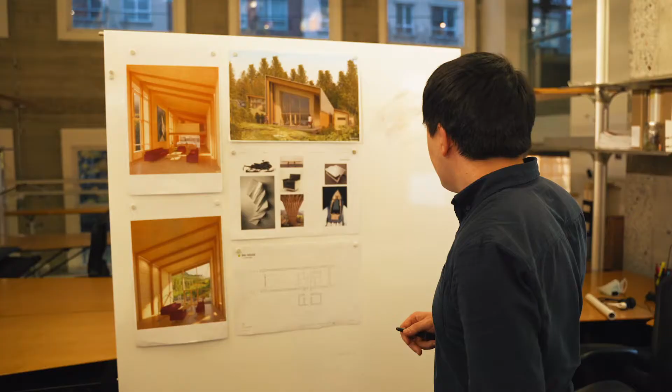SoLo was born out of a deeper understanding of the impact buildings have on emissions, climate change, and health and well-being. This project afforded ourselves and the broader project team an opportunity to test ways and means to achieve net zero, both in embodied and operational emissions.

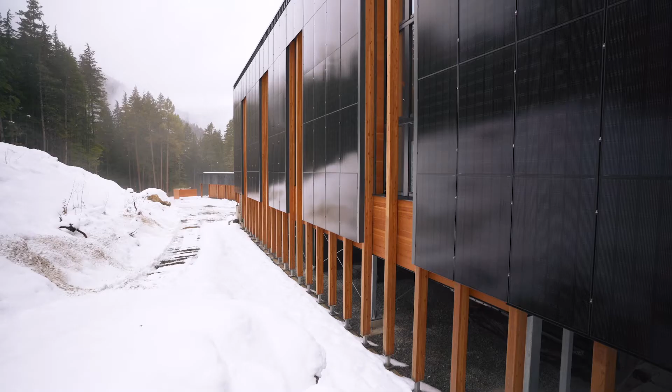Our president, Bruce Langereis, has coined the name SoLo as a nod to its isolated location in the lower Squamish Valley, but also as a reference to its zero emissions profile and the fact that it stands alone as a one-off example as a future way to build. SoLo represents a new way forward for Delta land development and is a catalyst to help accelerate change in the broader development and building industry.

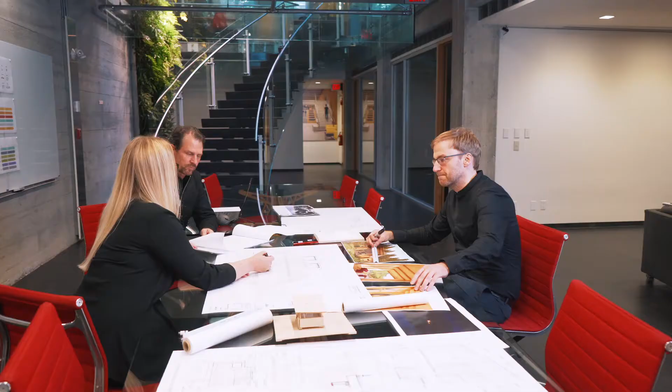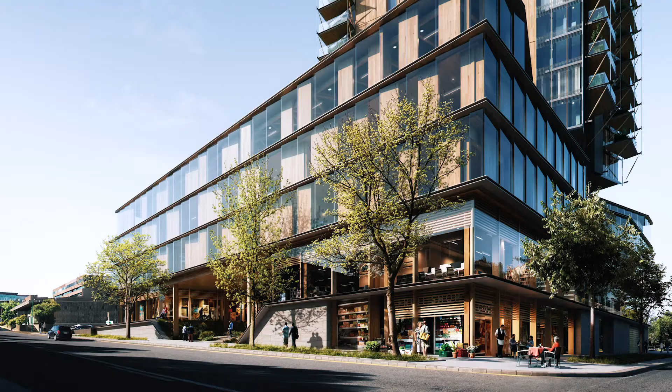Delta was looking for an architect that shared their alignment of values, and that's what led them to reach out to us. Our studio, Perkins & Will, are really known for our reputation in environmental stewardship. We started our work with Delta by creating an overarching set of principles and goals that would lead every decision made on the project. Delta wanted to test out not just the mass timber construction methods that had been proposed for Canada's Earth Tower, but also the broader set of principles and goals around holistic design.

This includes everything from eliminating harmful materials used both in construction and finishes, minimizing our energy consumption through high-performance appliances and fixtures, while also generating energy on site, and reducing emissions. The building structure is beyond carbon neutral, and the building does not rely on combustion for operations. SoLo is a proof of concept. It proves that buildings can counteract their negative consequences and act as a source of repair.

Delta wanted an open layout, something that would serve both as a single-family home, but also be able to host large groups for events, gatherings, and educational purposes. Beyond just a house, Delta really wanted to make a statement. They wanted something with wow factor, something that would celebrate the natural beauty of the site and prove that building sustainably and to the Passive House standard doesn't mean sacrificing design aesthetics or beauty.

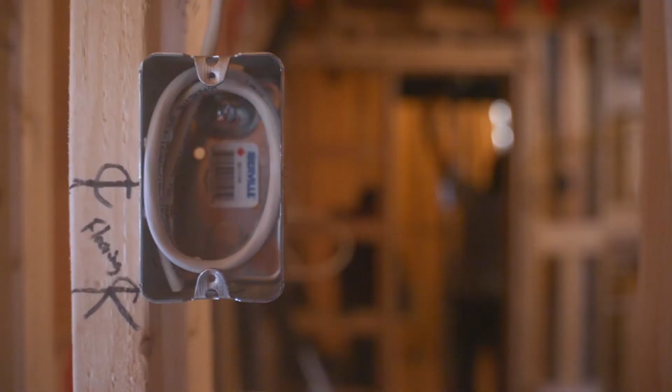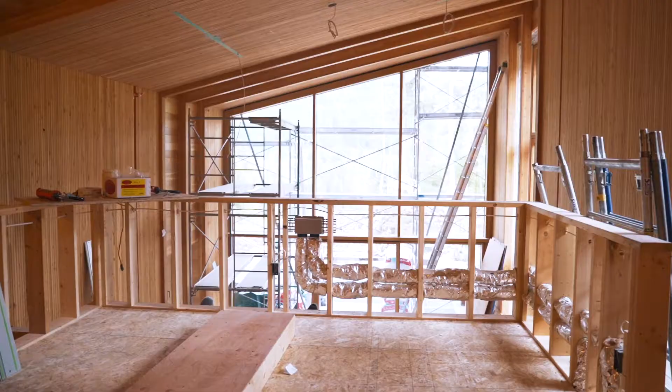The remote location of the site drove all of the design decisions, from building siting and construction methods to the interior finishes. The remote nature of the site led the project naturally towards prefabrication and modular construction methods. This allowed the panels to be built off-site in the shop during the winter months, and then to be erected quickly on-site during the shortened building season.

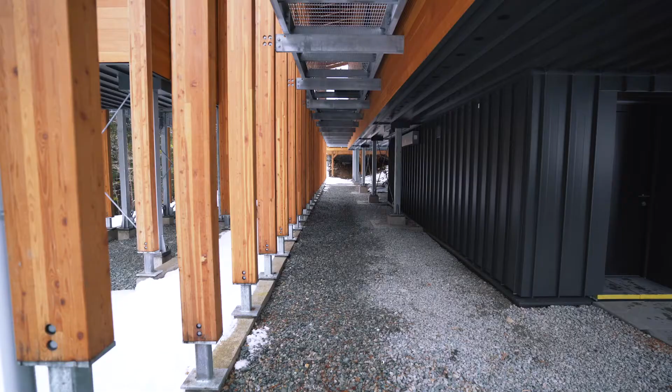We designed SoLo to have a performance-led aesthetic. It contains a limited material palette and contains architectural features that are authentic and unsentimental. The building sits on a raised platform above the uneven terrain of the site. It touches the ground lightly and allows nature to remain the focus. As you walk up the front steps, the covered walkway frames a view to the mountains beyond.

Wood was chosen as the primary structural material. It was the obvious choice to reduce our carbon footprint, but it also provided flexibility for the prefabrication of the modular panels.

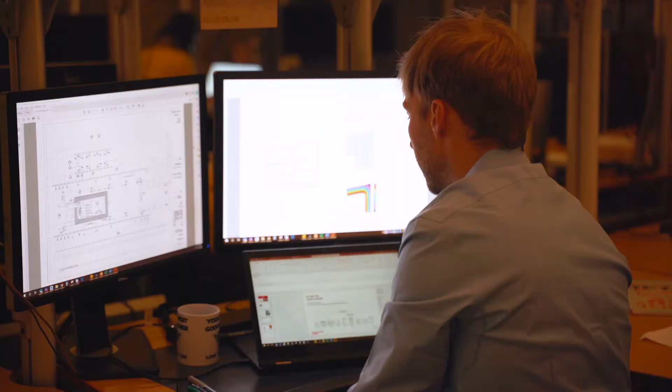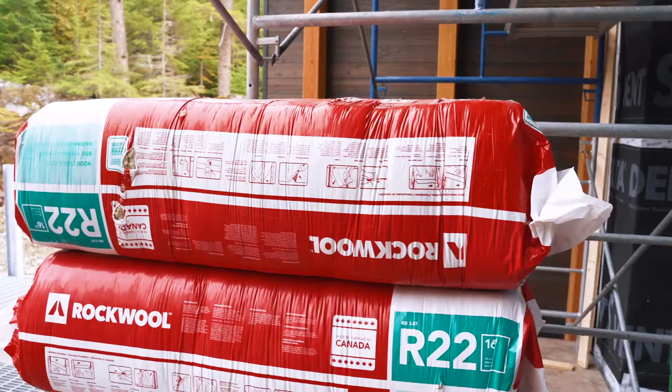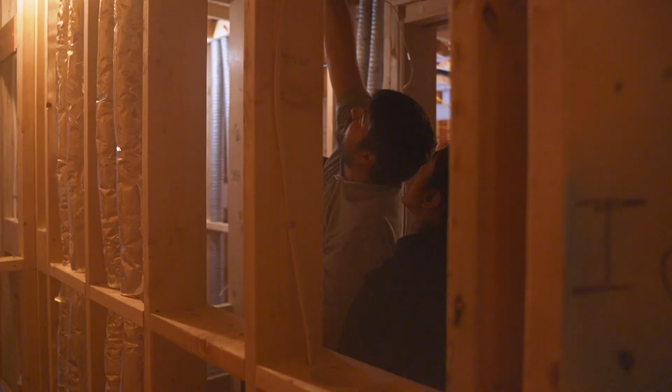Thermal comfort is guaranteed through a thick 2-foot layer of mineral wool insulation that wraps the mass timber structure, in addition to high-performance triple-pane glazing systems. Detailed thermal bridge calculations are carried out at design stage, and an air tightness blower door test is done at construction stage. These measures minimize heat loss, eliminate drafts, and reduce the risk of condensation buildup.

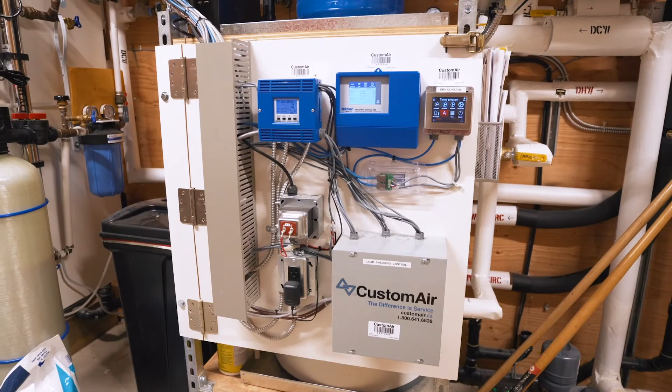The glazing design is optimized to maximize views to the valley outside and promote daylighting, while allowing sun in the winter and eliminating solar gain in the summer. A high-efficiency heat recovery ventilation system ensures a constant supply of fresh air, while recovering waste heat from areas like the kitchens and bathrooms. Natural ventilation is used for cooling in the summer, with windows judiciously sized and placed to promote cross-ventilation.

The small heating demand in winter is provided for by a radiant underfloor heating system. This is fed by a ground source heat pump that uses energy from the sun that is stored in the ground as heat. Energy is generated on site through the use of 103 solar panels mounted on the south facade. The vertical mounting allows the PV system to remain clear of snow in the winter when energy generation is crucial.

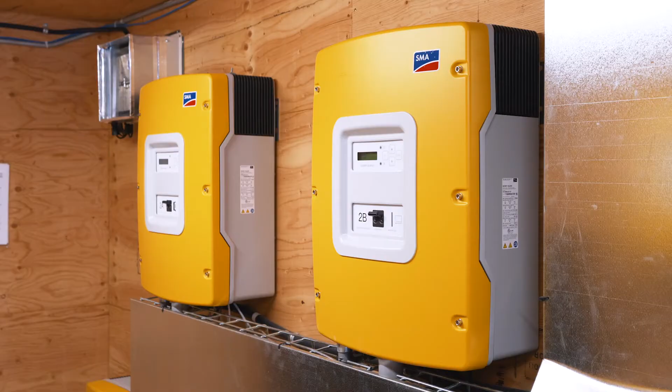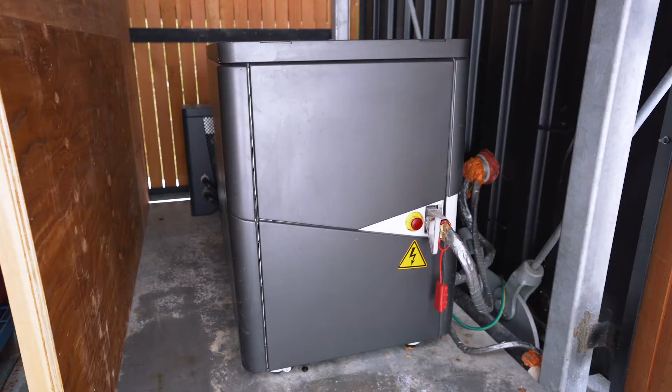The PV system links back to a set of batteries which store the energy generated. Being an off-grid site, we need a backup power source. This is provided for by the hydrogen fuel cell. This means that the building does not consume fossil fuels, nor does it require combustion to operate.

This results in a self-sufficient house that generates more energy than it uses and goes beyond net zero energy. It tackles both embodied and operational carbon and creates an innovative model for buildings in the face of the climate crisis.

The construction and operation of buildings contributes nearly 40% of global CO2 emissions, and it's broadly accepted that this has to change. SoLo was our first opportunity to explore ways and means to get to a truly net zero outcome and radically improve on what has been done before.

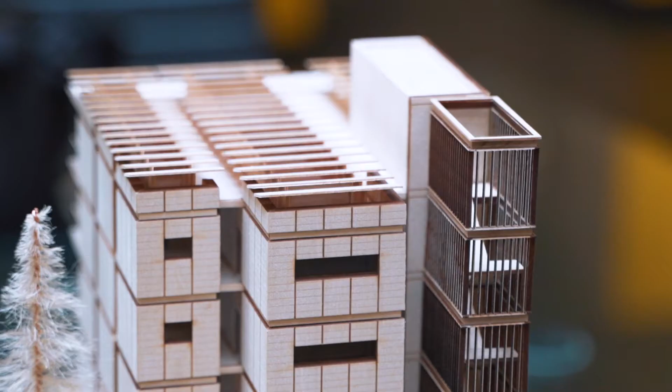At Delta Land Development, we've embraced a philosophy that prioritizes health and well-being, with environmental stewardship and building performance at the core of every development we undertake moving forward. As an industry, we need to develop projects that not only look at reducing the impact on climate change, but actually act as a source of repair. For example, through sequestering carbon in the structure, as we've done here at SoLo through the use of mass timber.

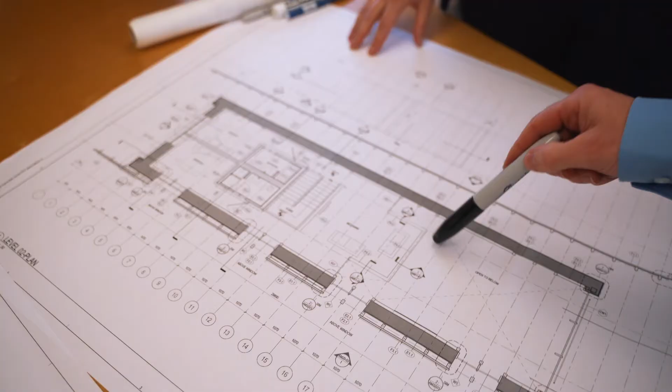Incremental improvement is no longer good enough to get us to where we need to be, and it all boils down to a choice. As we found here building SoLo, there's no technical or even commercial impediment to achieving a deeply sustainable outcome, but also maintaining function and aesthetic in the process. Adopting principles such as passive house and the use of mass timber not only help reduce energy and emissions, but also significantly increase the quality and resilience of the building.

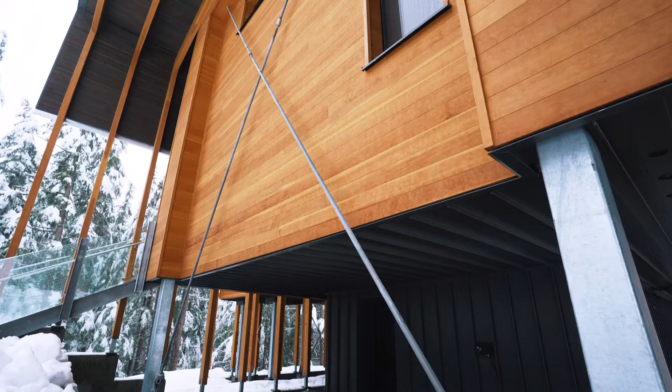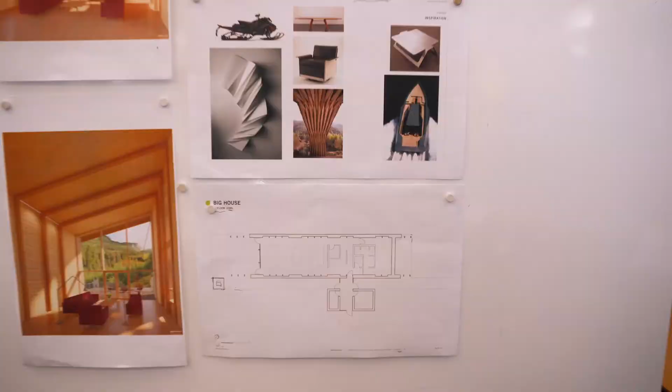There really is no downside to adopting a high-performance building approach. Design excellence is maintained, quality and resilience is heightened, and the experience within the house is not only healthier and more enjoyable, but better in every imaginable way. Not only have we achieved the goals we set forth at the outset of the project, but we've learned a lot along the way, including that we need to focus on simplifying ways and means to achieve a deeply sustainable outcome.